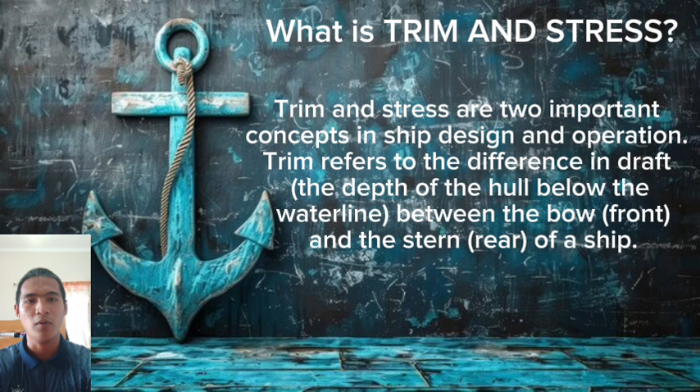What is trim and stress? Trim and stress are two important concepts in ship design and operation. Trim refers to the difference in the depth of the hull below the waterline between the bow (front) and stern (rear) of the ship.

What is stress? Stress, on the other hand, refers to the internal forces acting on a ship's hull and structure due to various factors like waves, cargo weight, engine vibration, and the ship's own weight. These forces can cause deformation, bending, and even failure of the hull if they exceed the ship's structural limit.

What is watertight integrity? Watertight integrity in a ship refers to the ability of its hull and internal compartments to prevent the ingress of water in the event of damage or flooding.

What is watertight? Watertight refers to the ability of a vessel or its components to resist the ingress of water under specific conditions. This means the structure, hatches, doors, and other openings are designed and constructed to prevent water from entering the vessel, even when exposed to waves, spray, or heavy rain.

What is a door? A door refers to a variety of openings on a vessel, each serving a specific purpose and often with specialized features due to the unique environment of the sea. These doors can be found both internally and externally, and their design and construction must consider factors like water tightness, fire resistance, and ease of operation.

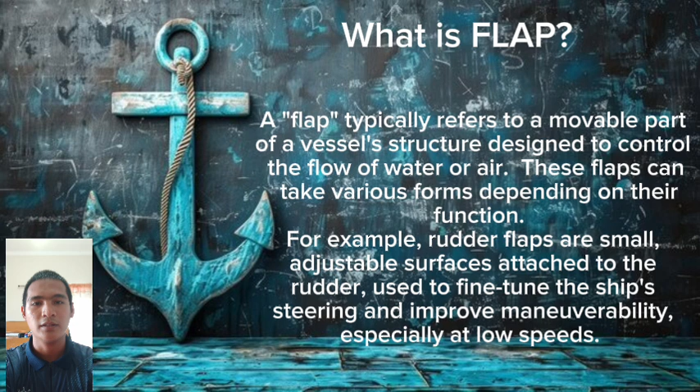What is a flap? A flap typically refers to a movable part of a vessel's structure designed to control the flow of water or air. These flaps can take various forms depending on their function. For example, rudder flaps are small, adjustable surfaces attached to the rudder, used to fine-tune the ship's steering and improve maneuverability, especially at low speeds.

What is a hatch? A hatch refers to a large opening in a vessel's deck or hull, primarily used for accessing cargo holds or other enclosed spaces. These hatches are typically rectangular or square in shape and are fitted with a heavy, watertight cover that can be securely closed to protect the cargo and maintain the ship's structural integrity.

What is a porthole? A porthole is a small circular window or opening in a vessel's hull, primarily designed for providing light and ventilation to the interior spaces. These openings are typically found in cabins, living quarters, and other areas where natural light and fresh air are desired.

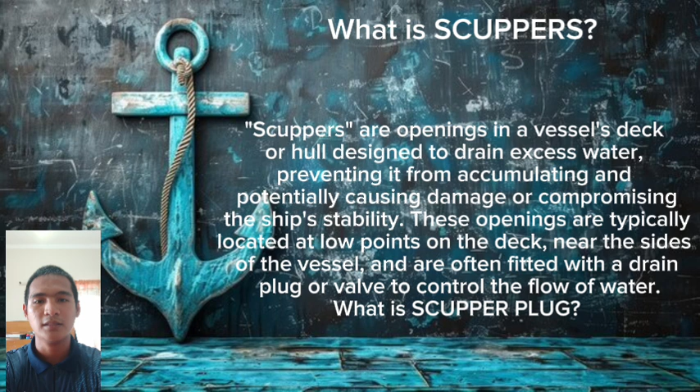What are scuppers? Scuppers are openings in a vessel's deck or hull designed to drain excess water, preventing it from accumulating and potentially causing damage or compromising the ship's stability. These openings are typically located at low points on the deck near the sides of the vessel and are often fitted with a drain plug or valve to control the flow of the water.

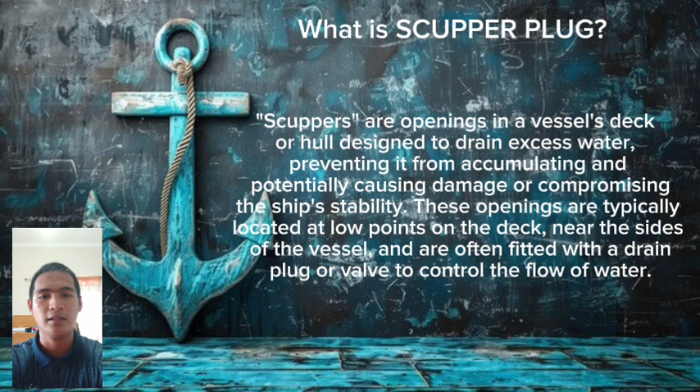What is a scupper plug? A scupper plug is a removable device used to seal the opening of a scupper, preventing the ingress of water into the vessel. These plugs are typically made of materials like rubber, plastic, or metal and are designed to fit snugly into the scupper opening, creating a watertight seal.

What is a bulkhead and deck? A bulkhead is a vertical partition or wall that divides a ship into compartments. These bulkheads are essential for structural integrity, water tightness, and fire safety. They act as barriers to prevent the spread of fire, water, and other hazards, ensuring the safety of the vessel and its crew.

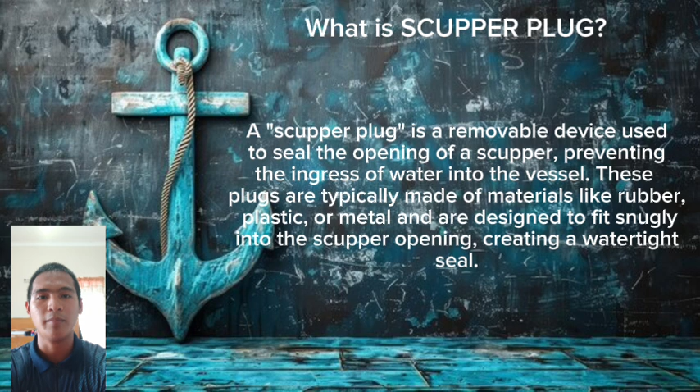What is damage? Damage refers to any harm or injury that affects the structure, function, or value of a ship, its cargo, or associated maritime infrastructure. This can occur due to a variety of reasons such as collision, grounding, harsh weather conditions, or operational errors. When a ship sustains damage, it can compromise its seaworthiness, potentially leading to hazardous situations for the crew, passengers, and the environment.

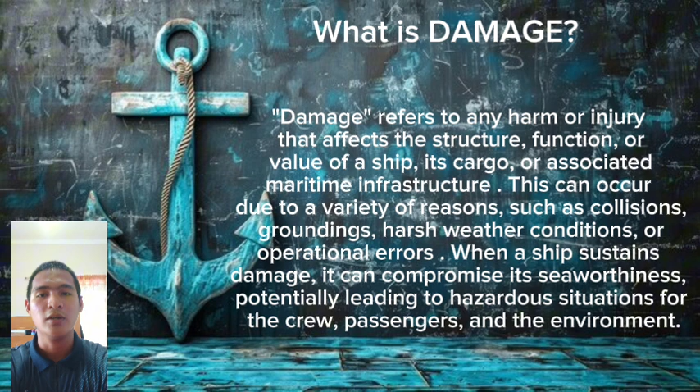What is gravity? Gravity refers to the force of attraction between the Earth and the vessel, which plays a crucial role in determining the ship's stability and buoyancy. This force acts on the ship's center of gravity, which is the point where the ship's weight is considered to be concentrated.

What is buoyancy? Buoyancy is the upward force exerted by a fluid like water when an object is submerged in it. This force acts in opposition to the object's weight, determining whether it floats or sinks. The principle behind buoyancy is Archimedes' principle, which states that the buoyant force is equal to the weight of the fluid displaced by the object.

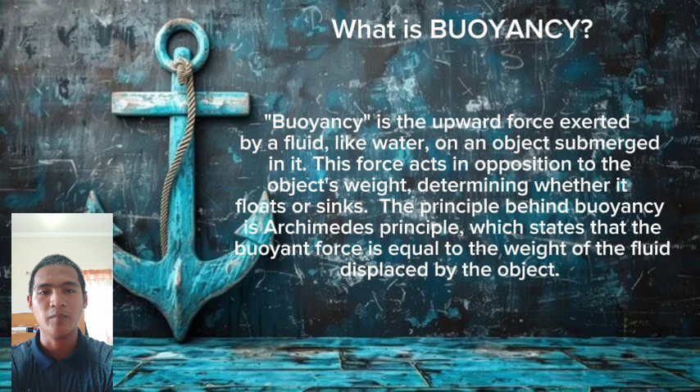What is metacenter? The metacenter is a crucial concept related to a ship's stability.

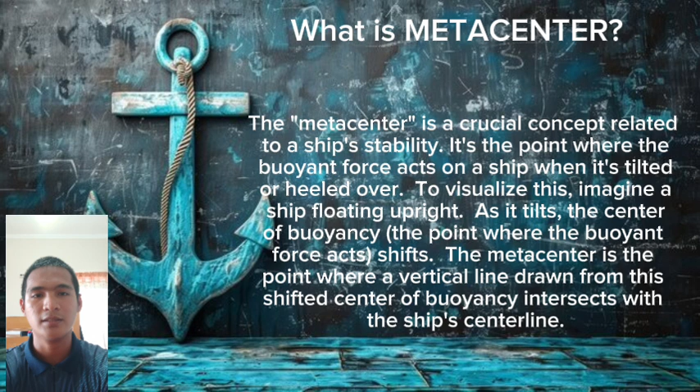It's the point where the buoyant force acts on the ship when it's tilted or heeled over. To visualize this, imagine a ship floating upright. As it tilts, the center of buoyancy, the point where the buoyant force acts, shifts. The metacenter is the point where the vertical line drawn from this shifted center of buoyancy intersects with the ship's center line.

What is equilibrium? Equilibrium refers to the state where a ship is balanced and stable, neither sinking nor capsizing. It's the point where the forces acting on the ship are in balance, maintaining its position and preventing it from tilting or moving, maintaining stability.

What is stable? Stable refers to a ship's ability to maintain its upright position and resist capsizing when subject to external forces like waves, wind, or changes in the cargo distribution. A stable ship is one that can return to its upright position after being tilted or heeled. This stability is crucial for the safety of the crew, passengers, and cargo.

What is neutral? Neutral refers to a ship's state of stability where it's neither inherently stable nor unstable. It's a delicate balance where the ship is easily influenced by external forces like waves, winds, or change in cargo distribution. A ship in a neutral stability condition is neither particularly resistant nor prone to rolling or capsizing. It's essentially in a state of equilibrium, but it's susceptible to external forces.

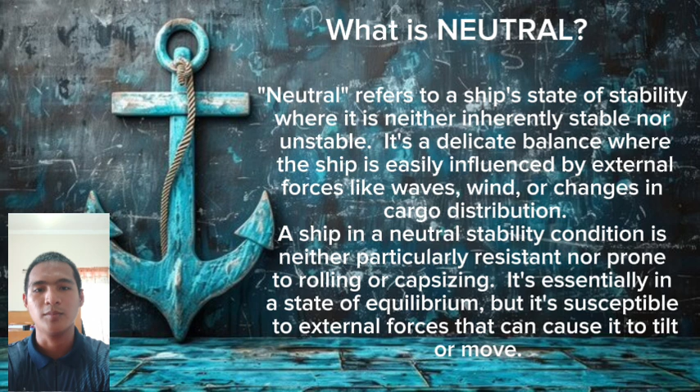What is unstable? Unstable refers to a ship condition where it is prone to rolling, tilting, and potentially capsizing when subjected to external forces. This is a dangerous state where the ship lacks the inherent stability to resist these forces and maintain its upright position.

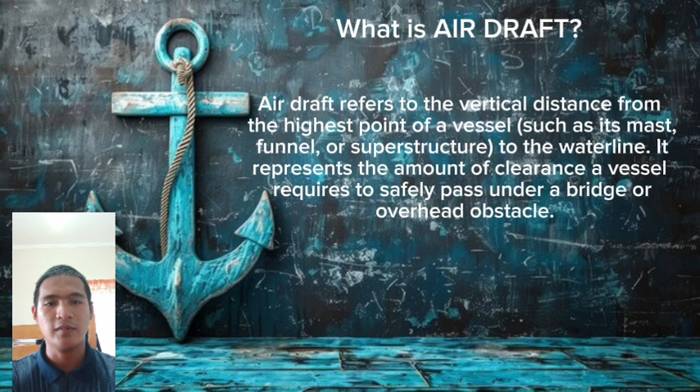What is air draft? Air draft refers to the vertical distance from the highest point of a vessel, such as its mast, funnel, or superstructure, to the waterline. It represents the amount of clearance a vessel requires to safely pass under a bridge or overhead obstacle.

What is draft? Draft is the vertical distance between the waterline and the lowest point of the vessel's hull, usually the keel. It indicates how deep the vessel sits in the water and is a critical measurement for safe navigation, specifically in shallow waters.

What is freeboard? Freeboard is the vertical distance between the waterline and the top of the ship's deck, usually the main deck at the side of the vessel. It represents how much of the ship's hull is above the water and is a critical factor for the vessel's safety and stability.

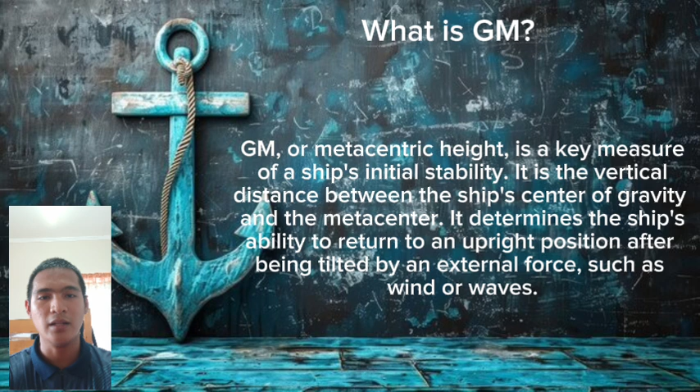What is GM? GM, or metacentric height, is a key measure of the ship's initial stability. It is the vertical distance between the ship's center of gravity and metacenter. It determines the ship's ability to return to an upright position after being tilted by an external force such as wind or waves.

What is GZ? GZ is the righting arm of a ship, a crucial factor in assessing the ship's stability. It's the horizontal distance between the center of gravity and the center of buoyancy line of action when the ship is inclined at an angle.

What is KG? KG stands for keel to center of gravity, which is the vertical distance from the keel of the ship, the bottommost part of the hull, to the ship's center of gravity. It's a key parameter in assessing a ship's stability.

What is KM? In nautical terms, KM refers to the distance from the keel to the metacenter of a vessel. It is a key parameter in ship stability calculations and is used to assess whether a ship will remain upright or capsize.

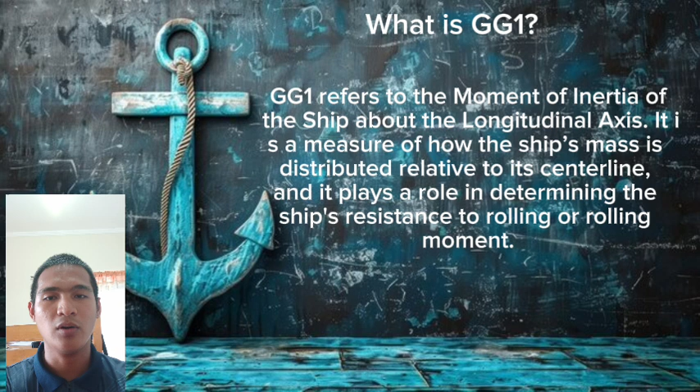What is GG1? GG1 refers to the moment of inertia of the ship about the longitudinal axis. It is a measure of how the ship's mass is distributed relative to its center line, and it plays a role in determining the ship's resistance to rolling or rolling moment. What is density? Density is a physical property of matter that describes the amount of mass per unit volume.

What is moment? Moment refers to a measure of rotational effect produced by a force applied at a distance from a point, often referred to as the pivot point or axis of rotation. What is LCF? LCF stands for longitudinal center of flotation in the context of ship stability and naval architecture.

What is longitudinal stability? Longitudinal stability refers to the stability of the ship along its length from bow to stern when subjected to external forces such as wave, wind, or loading condition. What is bodily sinkage? Bodily sinkage refers to the vertical downward movement of the entire hull of the ship when it is subjected to a load or a change in weight distribution.

What is LCG? It stands for longitudinal center of gravity. It is a key parameter in naval architecture and ship stability. What is VCG? VCG stands for vertical center of gravity. It is a critical parameter in ship stability and naval architecture, referring to the height of the ship's center of gravity above the keel or another reference point.